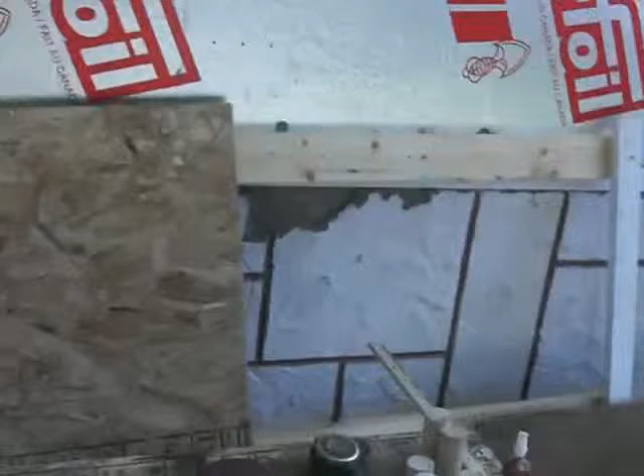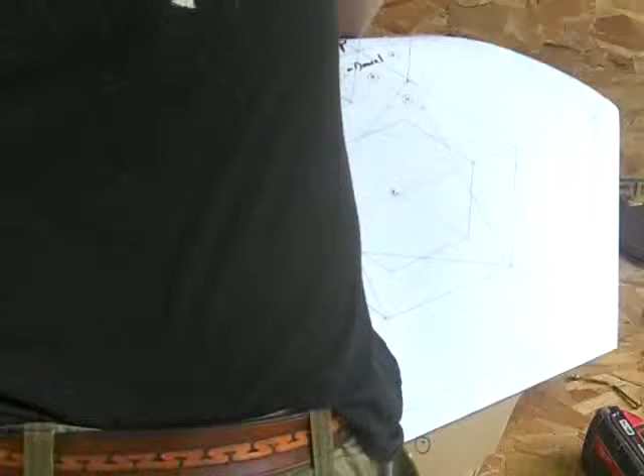This is the master template. Just going to spin it around here, maybe lift it up to get a better idea. This you need to know.

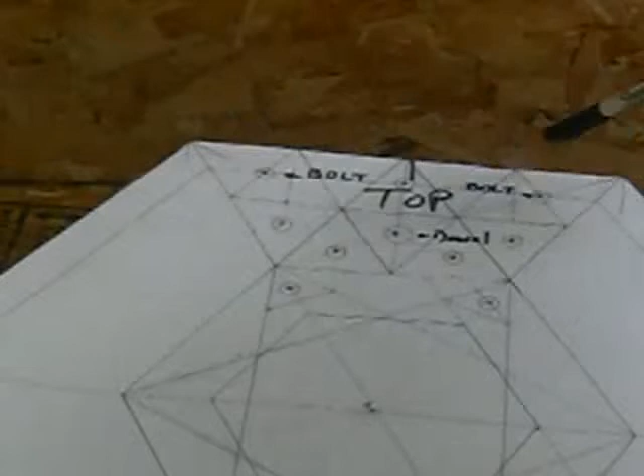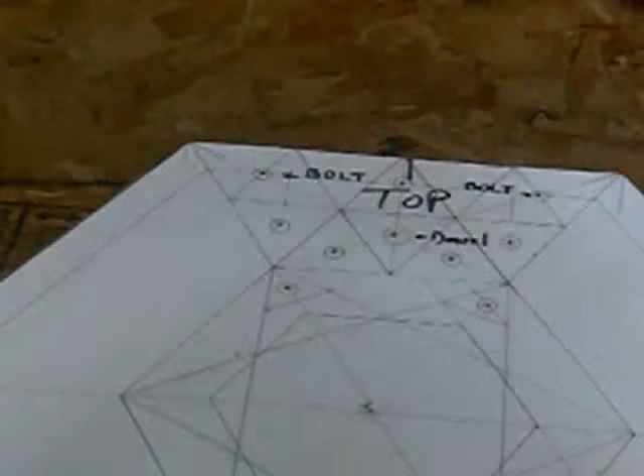This is where the tab and lock will go. This part will be secured and this part sticks out, which will actually go back into here. What I've done here, I've taken this half hex and divided it into 3 triangles, then divided it into 4 triangles each to give you your quadrants. This one here is your screw where your dowel goes into. Your dowel will be underneath this one.

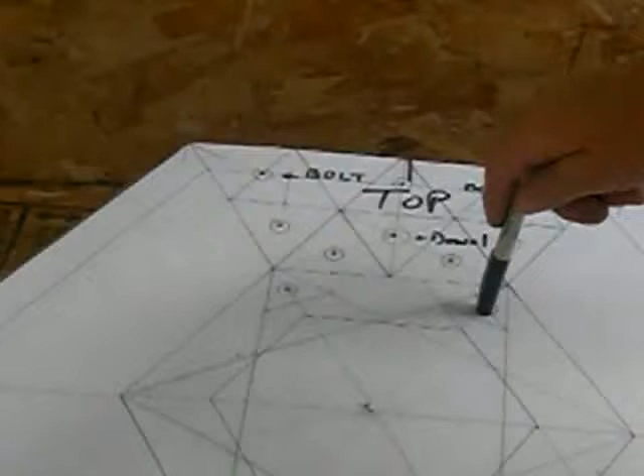This is a bolt hole, 1/4-inch bolt, a pan bolt. And these 1, 2, 3, 4 screws lock down the tab. Once you put it in through the top plate, you have your 2 screws that secure your center.

Okay, I'm going to back the camera up and just go through a dry run. As you can see, I already have all 7 panels already made up.

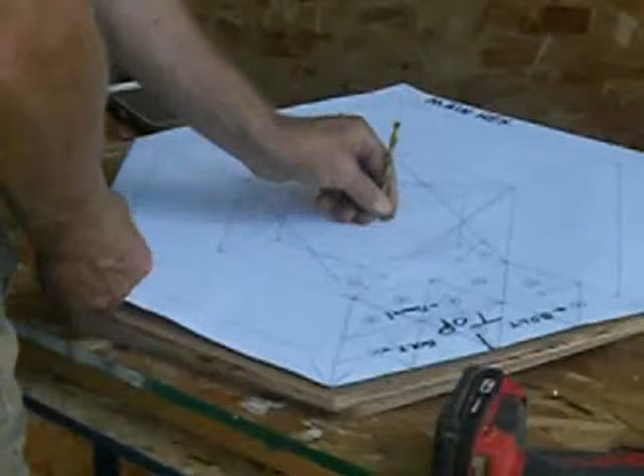Put this aside. So what I did with this, turn this around here, this has already got the holes in it. I'll put the thing in the center, drill that, put it over here, drill this pattern, and put it over here, drill this pattern. That's what I did with the number 1 template.

Once you got your holes drilled through, this becomes a template, so you use a template to mark each piece. Use this countersink to countersink the screw holes. I marked out the 6 bolt holes and the 6 dowels, they don't get countersunk. So I did 1, 2, 3, 4, 5, 6 times 3, 18 holes for your screws.

Next thing that I did is go around where your dowel holes are already pre-drilled through on your pattern. I'll set her up on the bottom plate, actually should be here. This is bottom number 7. This is dowel, dowel, dowel, and dowel.

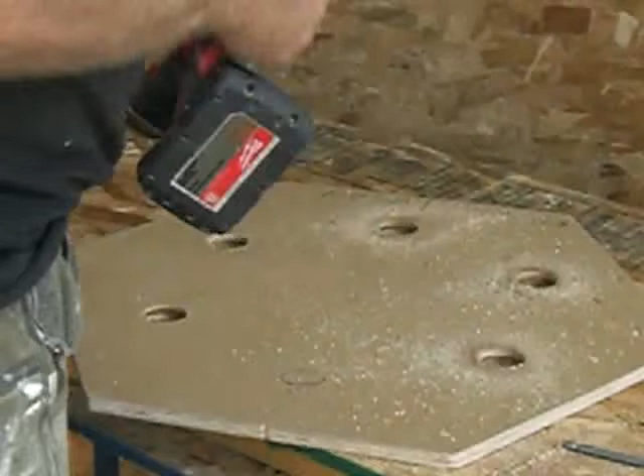Should have blocks under this, but it's alright, it's a work table. This hole saw is pretty well wore out. You have to make sure you keep your set screw right here, a small 1/8-inch set screw, tight. It does come loose, and also your mandrel or your arbor, you have to keep that tight. It did fall apart on me.

Hopefully the camera's still running, looks like it is. So altogether, you do all your prep work and set your dowels in about 15 minutes. We don't need that anymore.

At the bottom there, got 2 more to cut out, so I'm just going to set the 4. What I do here is a ribbon of white glue, take my fingers, spin it around, center of the hole, a few taps. Doesn't take long at all.